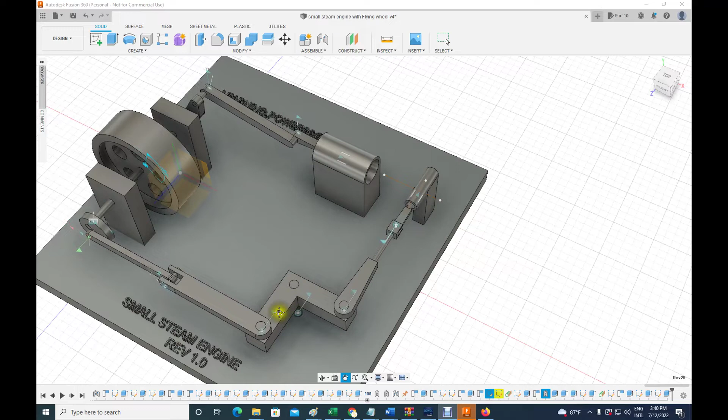I would not say most designs, but for a small engine like this it's one you see a lot on YouTube. This type of design uses this kind of rocker arm. So now, where does this come from? Basically, I got an idea.

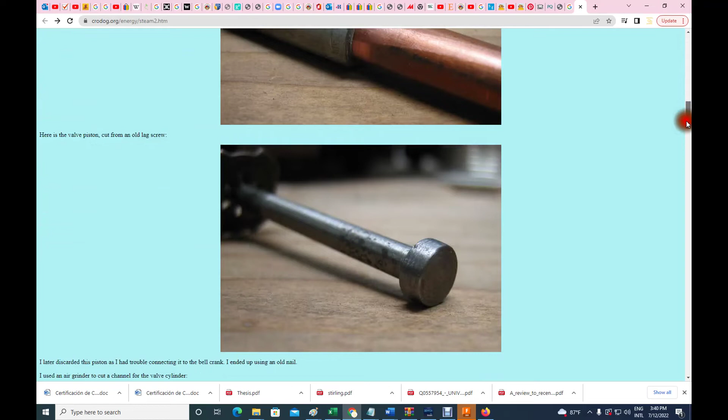From this guy, this page here, and it's kind of interesting. This is kind of old, October 2008, but it has pretty good information about how to put this together. As you can see, it's a picture of the unit running here, and a little bit more clear here. But what it's all about is the rocker arm, and this is a nail that works as a sliding valve.

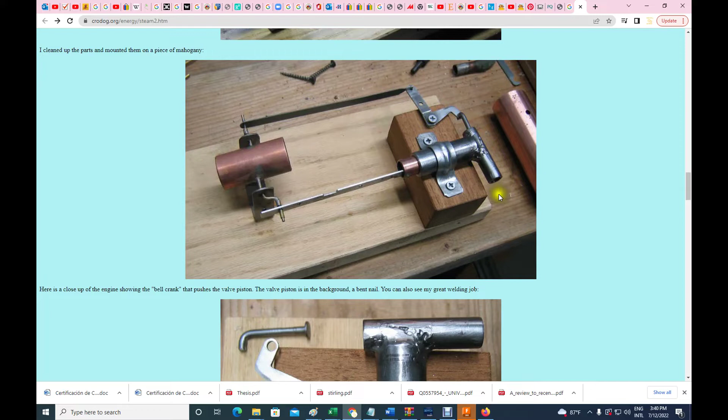Either steam or air goes in through here, and that powers the piston that is in this cylinder. And instead of using a flywheel, he used a piece of copper pipe here, just to get the inertia going. So you can see most of the details.

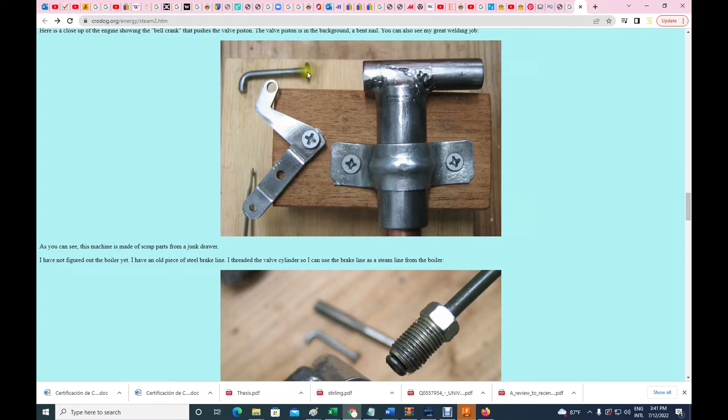And here's the nail. When the nail is all the way this way, it blocks the steam or air getting in. But when the power piston is coming down, there is this space here that allows air or steam to go out. So steam or air will go out this way. But as soon as this nail comes this way, that's when you get power into the piston. So it's pretty neat, pretty efficient the way it works.

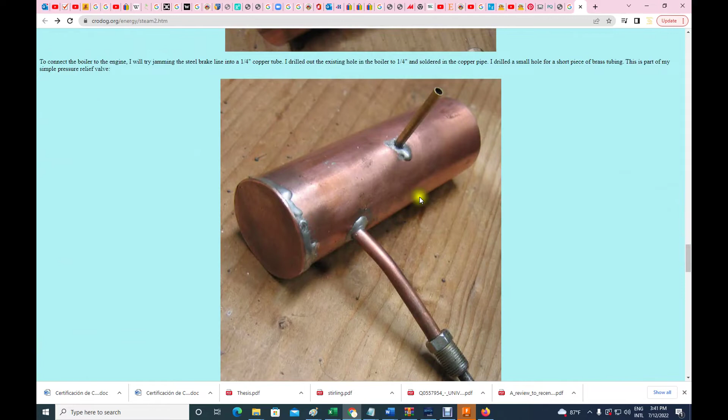And here's the boiler for this equipment, and that's pretty much it. You can see this last one. This is very old. As I said, this was prior to the elimination of Flash. Flash is no longer available, but there's a trick where you can go to Firefox and get a Flash emulation, which will allow us to see anything you want, even that old.

So for example, right here, let's open this big. Let's see if I can do that. Enter full screen. There we go. And here he's heating the steamer, and here's this hose here. It's like the release valve in case something gets too much pressure. And here the steam is getting connected, and that's pretty much how it works.

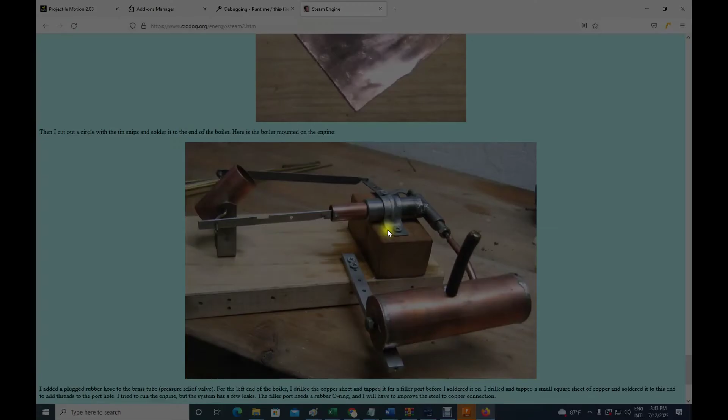So basically, I took this as the idea of how to put my unit together. With that said, let me get out of here for a second. Let me go back here, and everything looks good. The idea is to allow you to see the details about the sliding valve and how it operates, because you can see there's good timing between the sliding valve and the power piston.

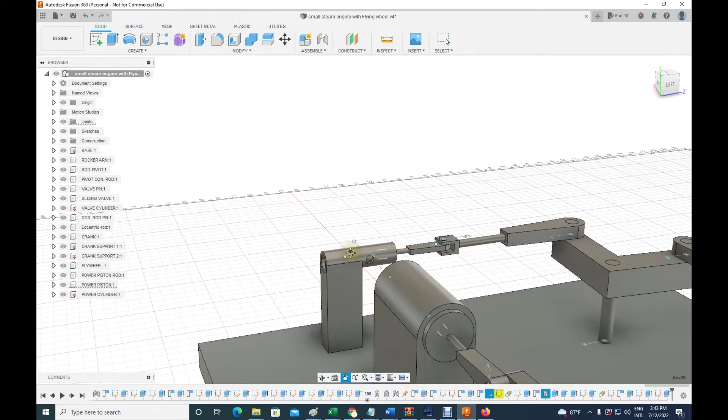Let me get the browser here, and here are the names of all the elements I put together. For example, let's hide the sliding valve cylinder, because then you can see the recess that this sliding valve has. When it gets deep into it, you see now, as the piston pushes down, air will escape through that recess on the sliding valve.

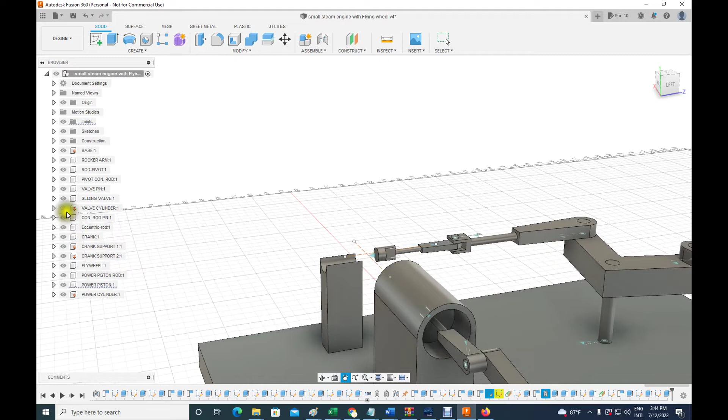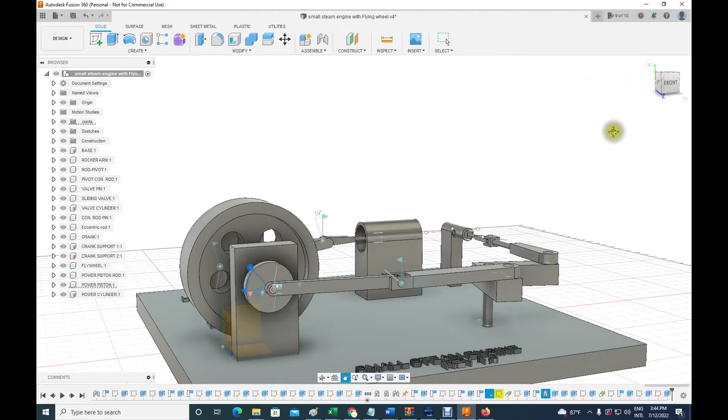Let's put the sliding valve back. Sliding valve right here. See, air goes right through here, and that's very important for the timing. Now, I spent more time on this design than I originally planned, because I thought to put this rocker arm together using this concept here, enable contact set.

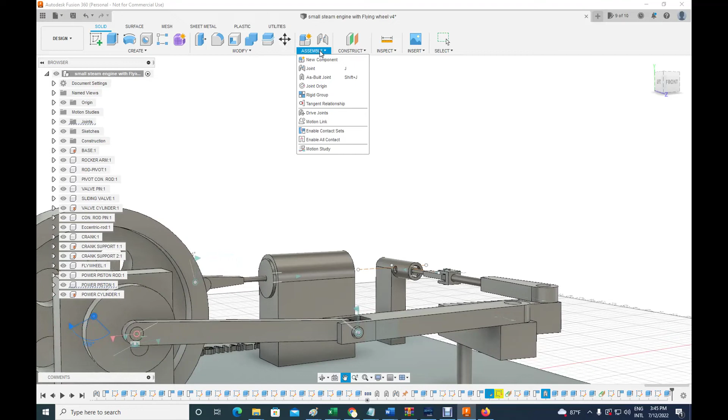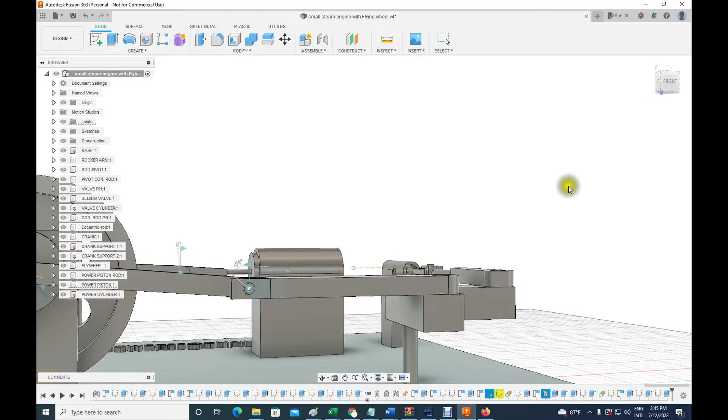But the more I thought about it, I said it might not be a good idea, because I know Fusion 360 has this problem with contacts, so I decided not to use contact and go with joint connections. As you can see, you can definitely design this by pushing the rocker arm, and the rocker arm will do its trick. But on this design, I used joints all the way, as shown here.

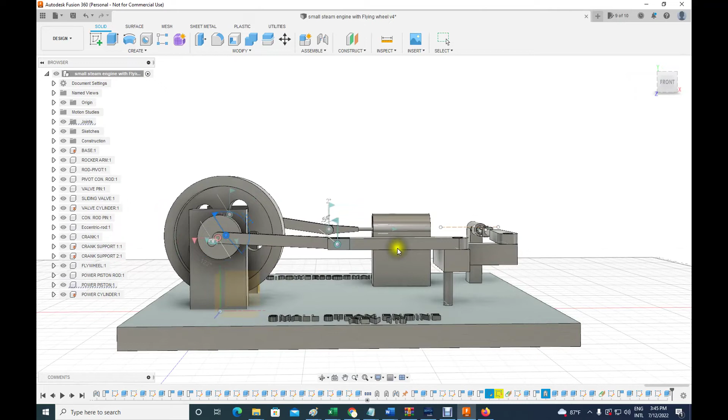When I finished this design, I had a problem. I got something misaligned a little bit, just enough. For the real system, it might work without any problem, because these are wires, and they can bend and allow for some imperfection. But here they have to be perfectly aligned for Fusion 360 to take care of it.

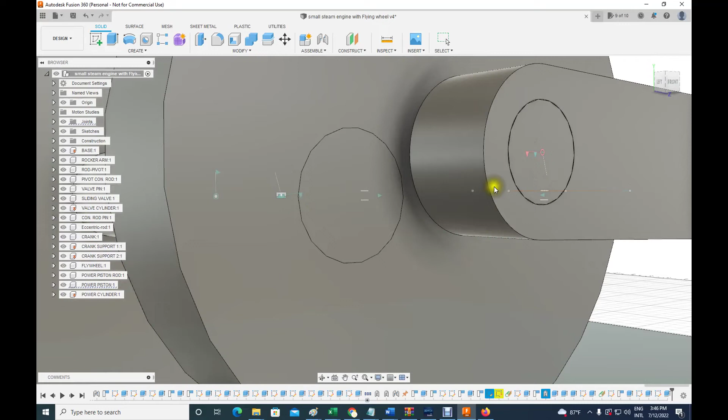So as you can see, I ended up having a very different connection here on the eccentric. And that was very interesting. I think there's a misalignment somewhere. I didn't realize that until the end. So let's escape from here and take a look at this guy here.

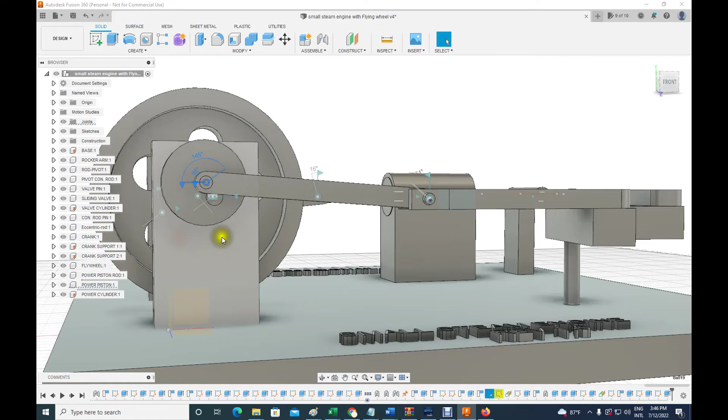Is that the guy? Let me see. Edit joint for 1 second, and motion. Yeah, right here. You see, the motion is a ball type of motion between the rocker arm and the eccentric. Animate,

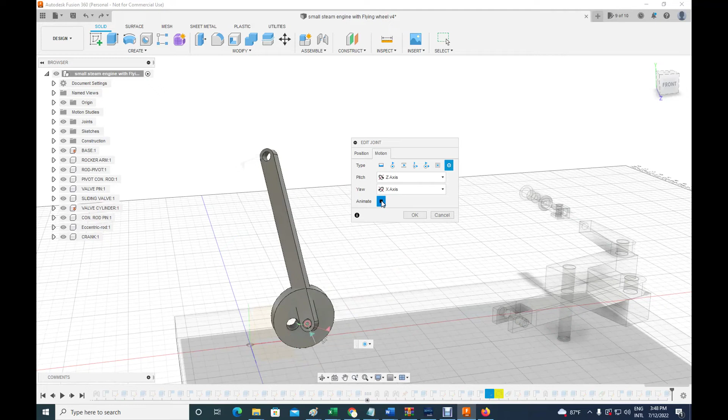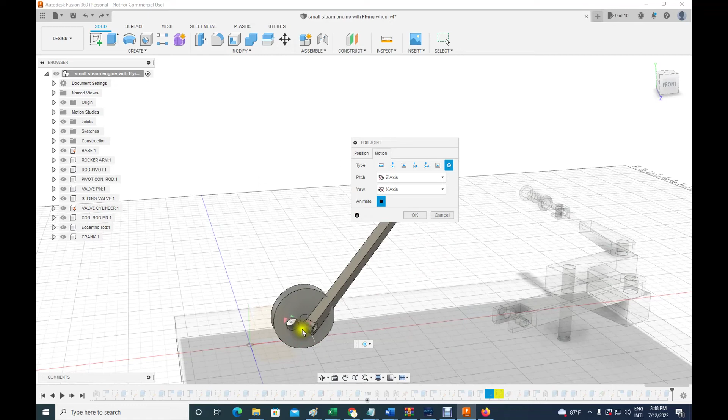and that provides enough freedom to get this going, and capture some of the misalignment that I had when I was doing this design. But that's just things that you have to be careful with, particularly because these are stiff. They don't bend like wires might when you use bicycle spokes. I mean, they will bend. They have some flexibility that will facilitate some of this imperfection, but not in this case. So I just changed the type of connection, and that will make life easier.

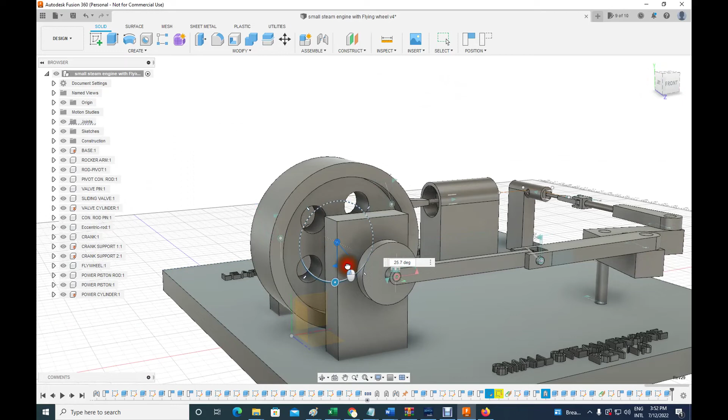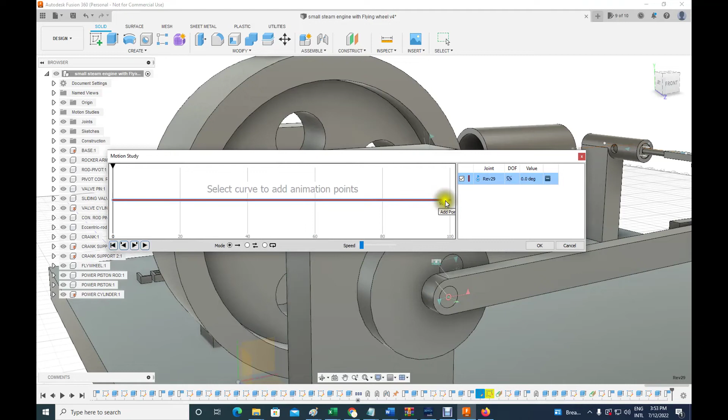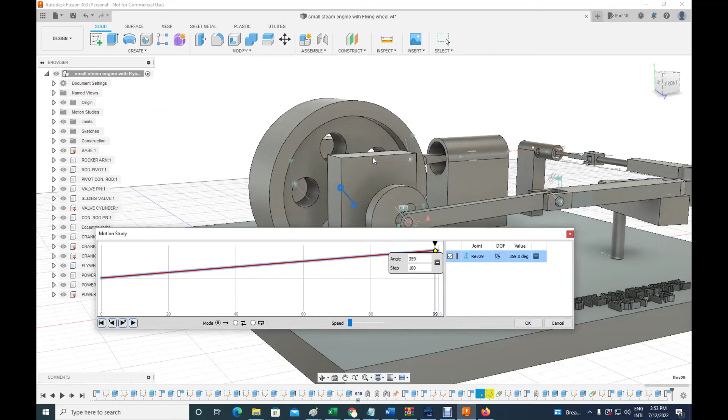So let's go back here again, and let's do a faster speed maybe. All right, capture position. 359. Can I do 100 here? Okay. So that basically will do.

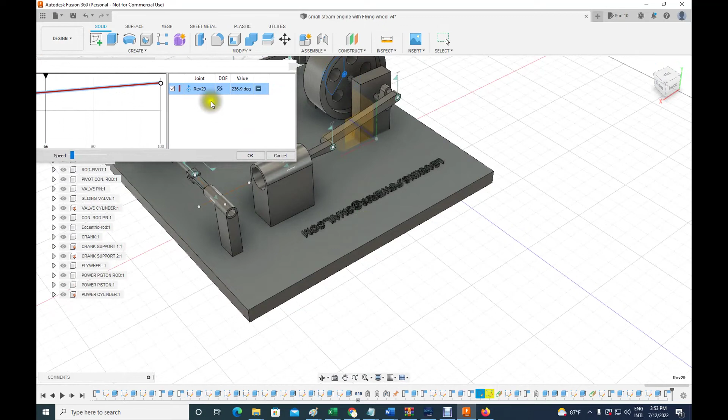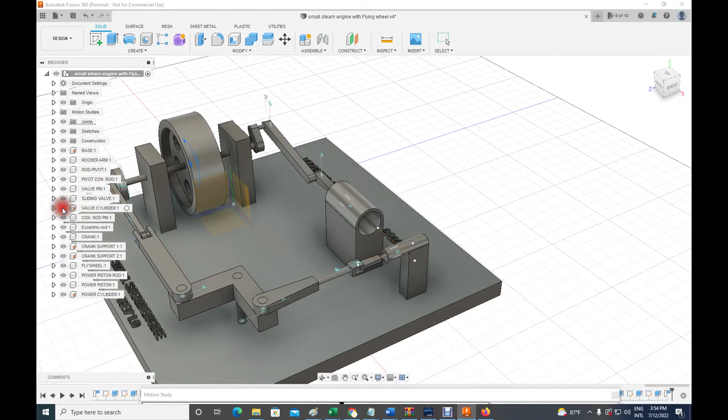Let's get this out of the way so that we can take a deep look at what's going on in the system. And so this is kind of nice. So when the piston goes down, air will go in, or steam will go in to push it up, through the sliding valve. If I get the sliding valve out, let's see, sliding valve cylinder, there we go. So you can see now at the top of it, let's check how the sliding valve looks.

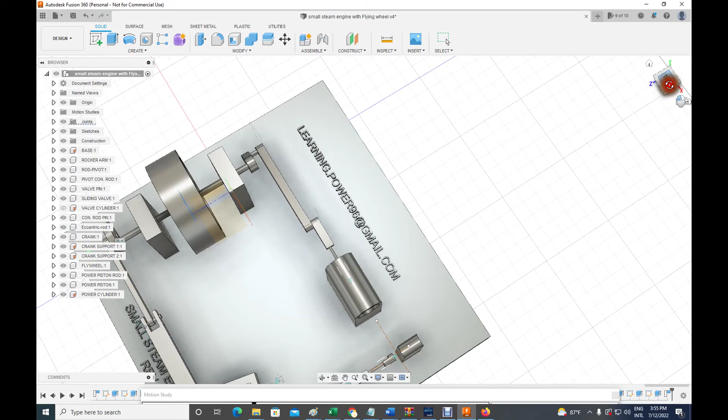It will allow air or steam to go out quickly. So there's a hole right here on the cylinder that will allow for steam to go in and exhaust steam to go out right through this. Let's see if I can put that back. So

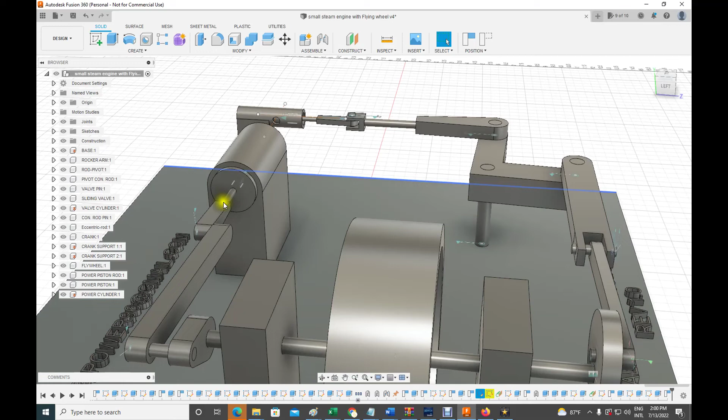let me explain a little bit better this timing issue. First thing, let's look at when I'm at the top and the power piston is at the top. The only thing that it can do is go down, and to go down, the air or steam that is in all this area has to be able to escape, and to escape, the recess within this valve needs to be shown, and that's basically what will start to happen right now. As I go, I move the flywheel down.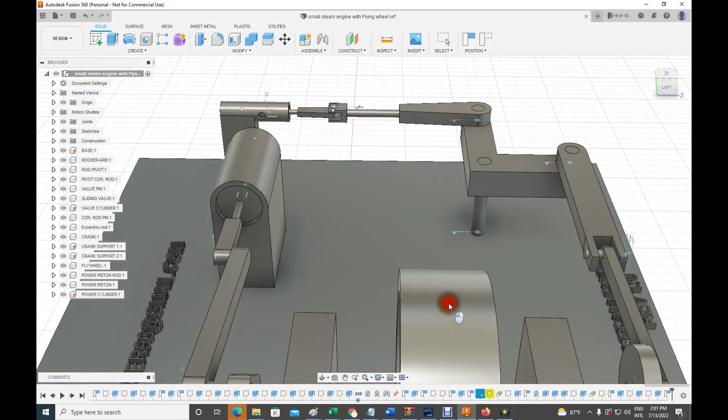Let me see if I can get a better view here. There we go. Right now, right there, what I'm seeing right now is the recess. Let's go back again. That's close. Now is the recess, and that's important because that's where steam or air will come out. You see, this is what you're seeing now, and this is what these lines are all about, to give you an idea of what's happening. So you are watching right now the recess because the power piston is coming down, and steam or air needs to escape right through that recess.

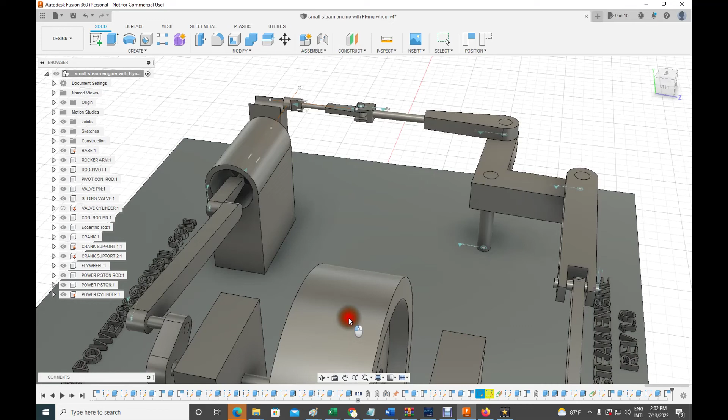So at that point, all the steam coming this way is blocked by this part of the valve. So if I keep moving, keep moving, more recess is shown until now it goes right to the bottom. Let's put this cylinder back again. Now you start to see a little bit of steam trying to get in through that little gap there, but a little bit more, move more.

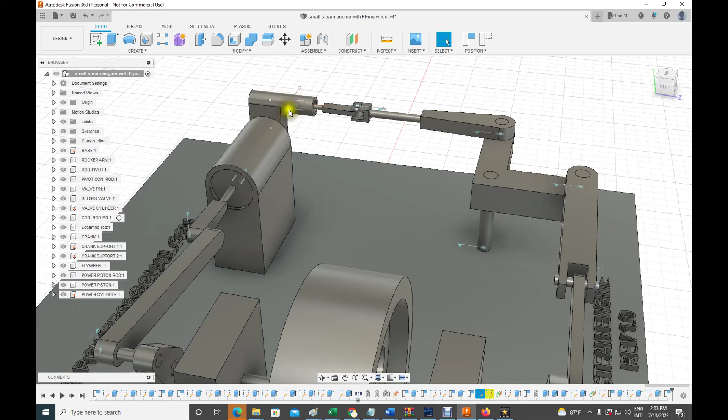There we go. That opening is now open full, meaning that the power piston is going to go up, up, up, and now the cycle will repeat itself because the power piston needs to go down, and you have to have a recess, and that is going to happen now. There we go. That's the recess. You can see it right here, and all the steam here will escape right through that recess until you are at the bottom, and at the bottom it opens steam or air from this side to get into the power piston and move it up. Well, that's basically the timing.

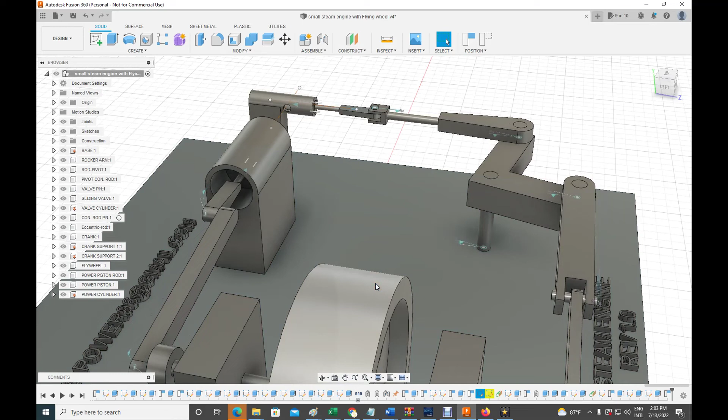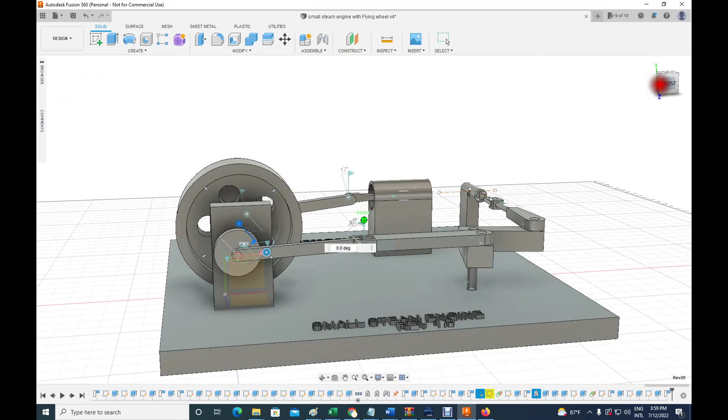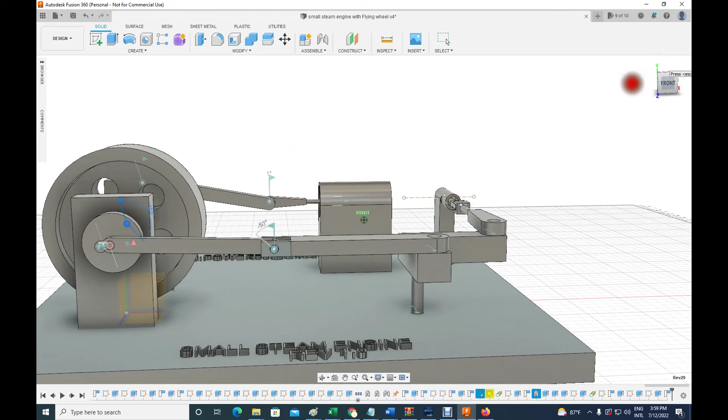Can I do animation again just so that it can fix itself? There we go. That could happen. It's animating too many things and something gets screwed up. But animating. Oops. Let me find out. There's so many things here, so many joints. Sometimes you get the wrong one. Animate model. There we go. That's the right one. Super.

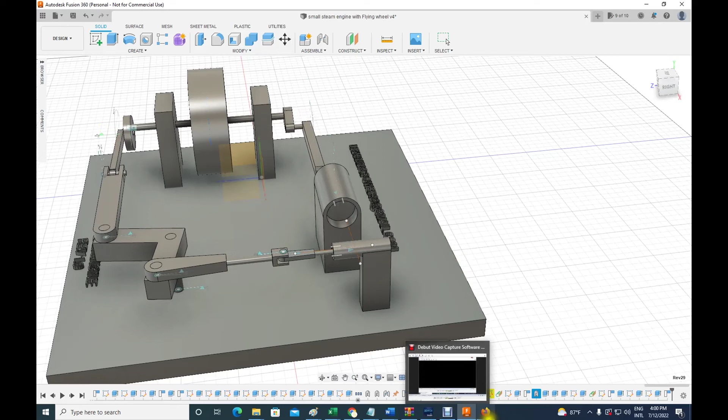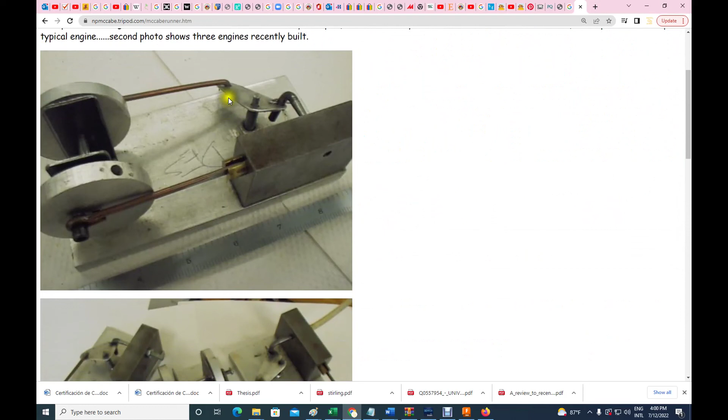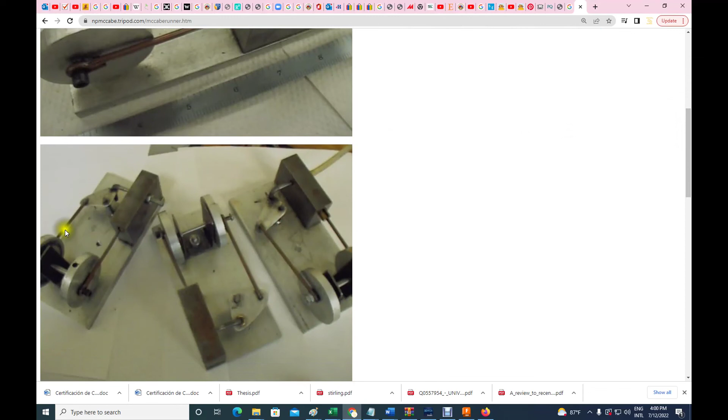More into some of the ideas where this comes from. Let's see. Some of them you can get from here. I mean, this guy did very good. Let's see what else. And the one that I picked from these many designs was the McCabe runner. So that's basically a good idea about this kind of rocker arm pivot for the sliding valve. And they're kind of neat. From one block you can design both things, the sliding valve and the power piston.

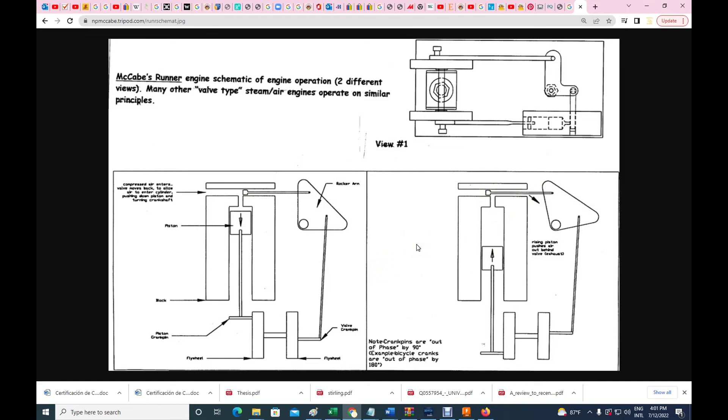So here's some of the schematic and the timing. Here's the timing for it. And here's the sliding valve, which is basically a nail. So when the nail is this way, then the power piston can go down, and air or steam can escape. So that's basically it. Let's go back again to Fusion.